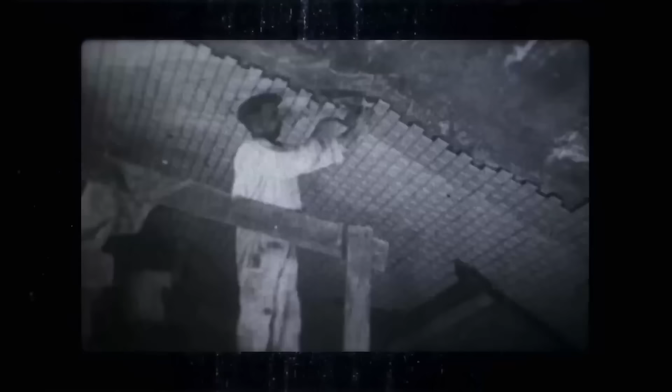Continuously modernized and always at the forefront of technology, it nevertheless retains the appearance of its early days. It owes this uniqueness to Parisians, who have held it dear since it was first created in 1900. Designed by visionary engineers such as Fulgence Bienvenüe, the father of the metro, and realized in an era where everything was possible, this megastructure has marked the capital with its imposing viaducts which crisscross the Seine. But how did they achieve such feats?

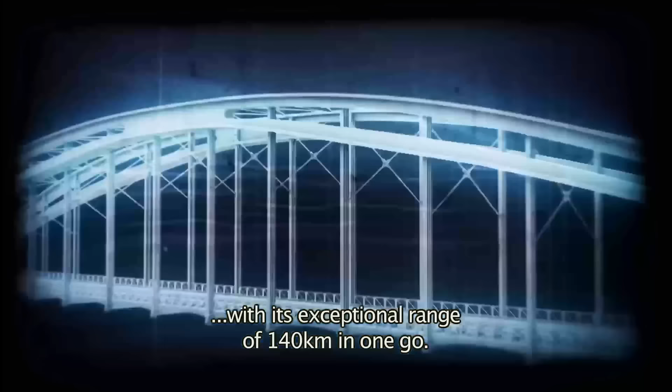The network has always benefited from the most innovative technologies. From the first wooden tunnels to chambers submerged in the Seine by freezing the ground, the construction, which began at the end of the 19th century, disemboweled Paris and boosted its performance.

As for the 400 trains, today they look nothing like the original wooden wagons. They are increasingly faster, more secure, automated and interconnected. The network has succeeded in its technological gamble and brought its historic lines into the modern age.

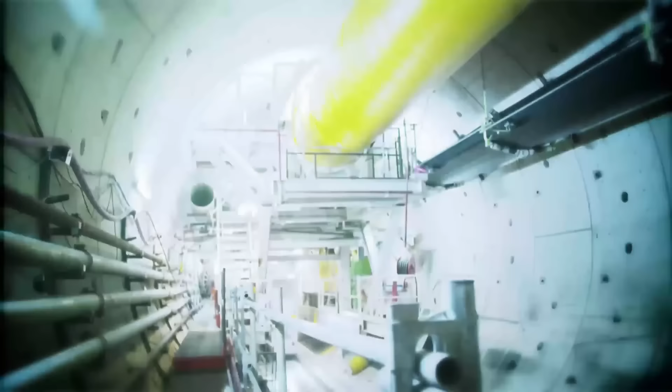Today, the network continues to grow, but the building techniques have changed. The Paris Metro uses the most innovative methods to continue its growth. These include giant tunnel boring machines capable of digging more than 30 meters deep.

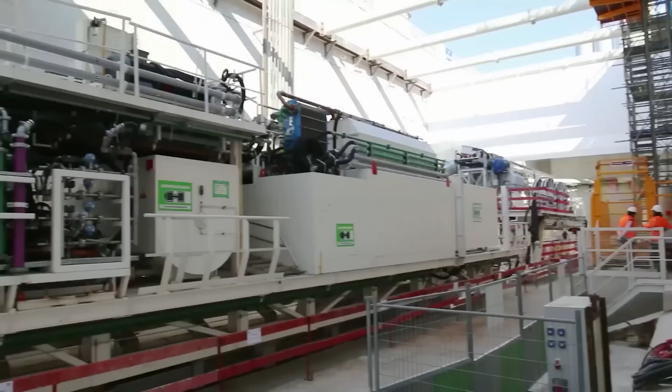We are in Saint-Ouen, on the site of the Line 14 extension, a titanic construction costing nearly €1.5 billion, situated in the heart of the city. Here, revolutionary techniques are used, making it almost invisible to the city's population. The project will add 6 kilometers and 4 stations to the existing line, linking the Saint-Lazare station and the Mairie de Saint-Ouen station.

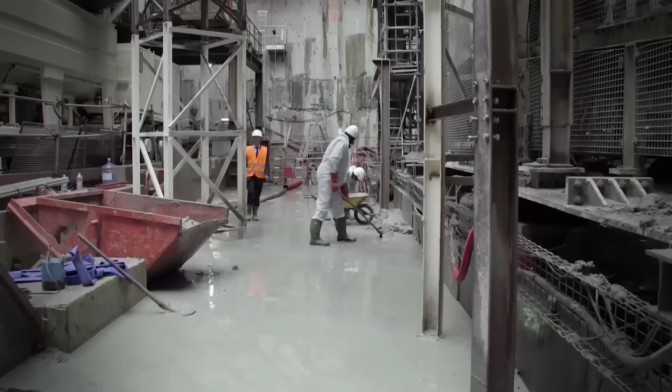25 meters below ground level, the tunnelling machine, Solène, is hard at work. It has covered 400 meters so far. Its aim is to create a new section towards Mairie de Saint-Ouen station.

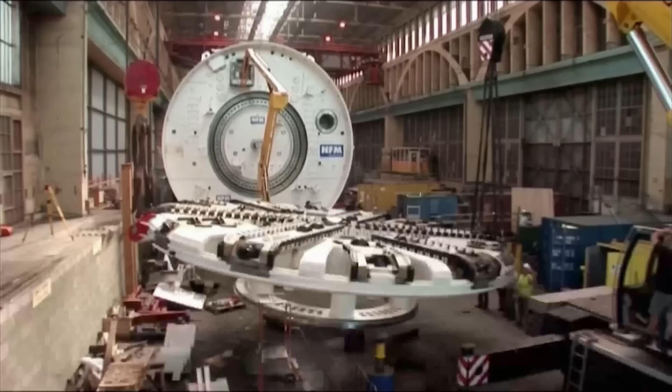Thanks to modern tunnelling machines such as this one in Saint-Ouen, developed by a French company, the construction goes a lot faster and the workers have given way to machines.

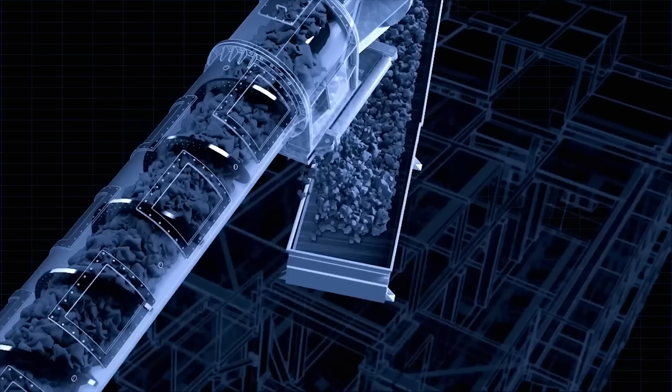The debris, saturated with water, is carried outside of the site on a conveyor belt. Stored in a reservoir, it is then taken away in lorries. At the same time that the earth is removed, the voussoirs which will form the tunnel walls are lowered into the starting well. They continuously supply the work of the boring machine.

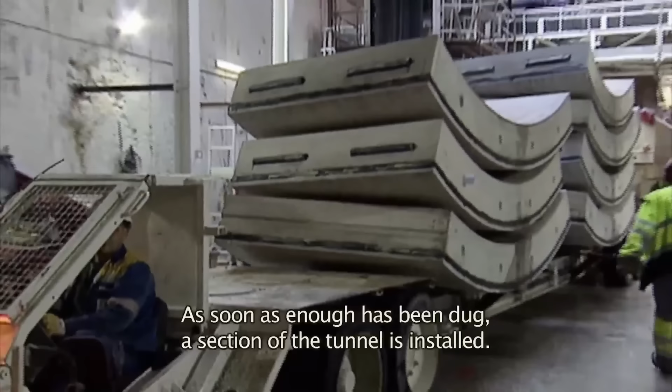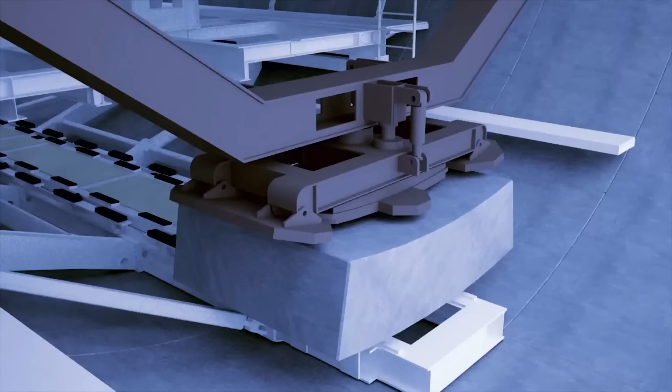Following the advancement of the tunnelling machine, a mechanical arm places the voussoirs one by one in a precise order. Assembled together, they will form the structure of the tunnel. The Romans used stone voussoirs to construct their arches. Like a giant puzzle, these prefabricated concrete parts weighing 6.5 tons fit perfectly together to form watertight walls. On this extension of line 14, it will take 7 to form a tunnel ring.

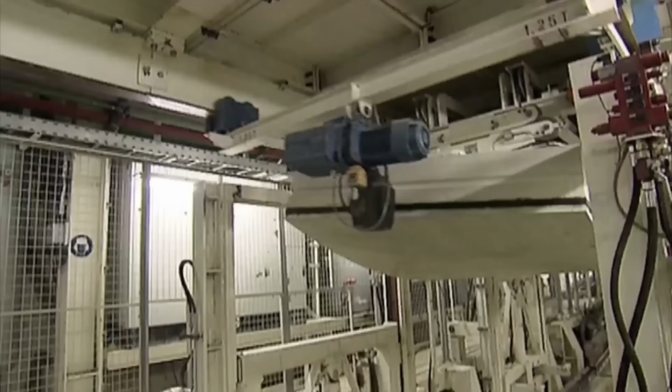No propulsion is required to move the machine forward. These hydraulic jacks allow the machine to lean against the voussoir that it installs and applies pressure which moves it forward. The tunnel boring machine at Saint-Ouen advances 200 meters a month towards its final target, situated more than 5 kilometers away.

The speed must be adapted according to numerous parameters, including the type of earth and the diameter of the borehole, similar to a drill that you don't want to overpower for fear that it might jam.

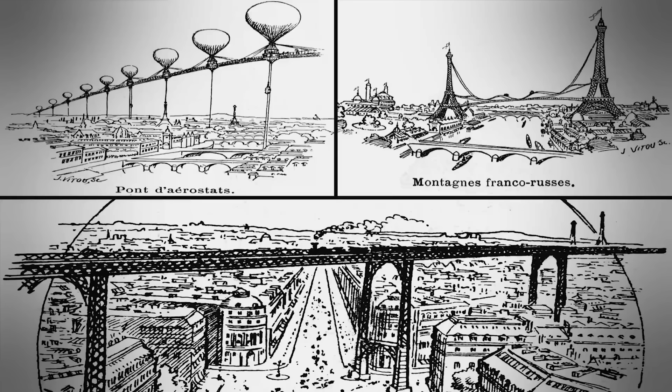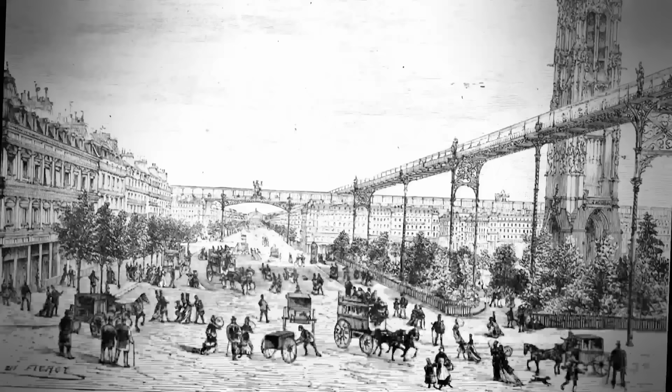Steam railway projects are discarded due to smoke emissions. The inventiveness of proposals for Parisian transport from visionaries and other passionate people is limitless. Airways hung by giant balloons, a suspended bridge between the two Eiffel Towers, an aerial tram passing over the city. Anything seems possible. The works of author Jules Verne seem to have inspired many of the projects, such as that conceived by a certain Monsieur Olivier, who in 1878 proposes an aerial tram passing over buildings in order to facilitate road crossings.

This goes on for 40 years, with no results. The Parisians will have to be patient.

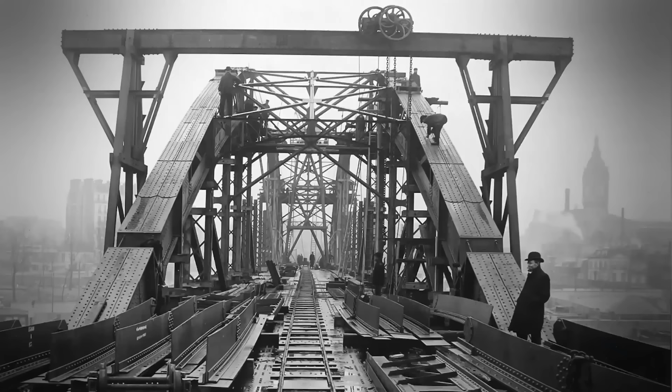The construction of the Austerlitz viaduct was decided in 1903 to link the two banks of Line 5 between the stations Gare d'Austerlitz and the current station Quai de la Râpée. In order to avoid interfering with river traffic, the navigation service demanded that it should have no supports in the middle of the river.

Situated 11.3 meters above the level of the Seine, the Austerlitz viaduct is made of steel. It consists of two large parabolic arches with three main joints, one at the top and two on either side near the riverbanks. The deck, which is 8.5 meters wide, is suspended from the arches by 16 supports in its center and 4 supports at its ends.

To withstand wind force, the suspension supports are connected by crossed structures. To reinforce the structure, the arcs themselves are also connected together. The selected project, therefore, outlined a viaduct with a single span of 140 meters, beating the 107.5-metre-long Alexandre III Bridge, which was until that point the longest in Paris.

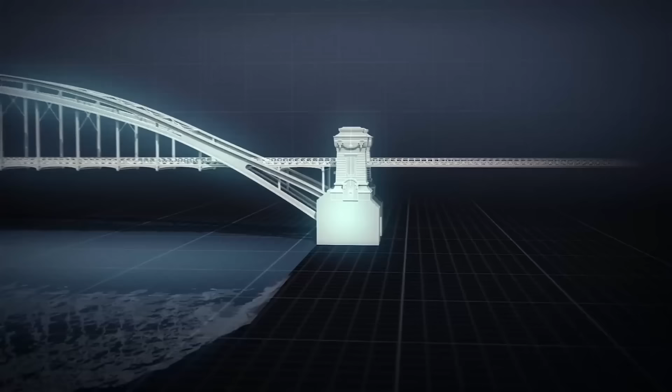On the banks, the viaduct arches rest on stone abutments, which are 22 metres long and 18 metres wide. Each of these blocks is surmounted by two 15-metre-high masts, which frame the deck of the bridge. A work that is truly extraordinary for its time. In July 1906, the construction is finally completed. Line 5, which links Gare de l'Est to Gare d'Austerlitz, is in service.

It is one of 6 lines which make up the initial project, but already a second stage of works is planned. For the designers, the metro must be for everyone, and no person should be further than 400 meters from a station. It is for this reason that the first line to be constructed consists of 18 stations for only 11 kilometers of track. It is the transversal line from east to west, which departs from Porte de Vincennes to join Porte Maillot. It runs along the Seine for nearly half of its length.

The construction for Line 1 begins in February 1899.

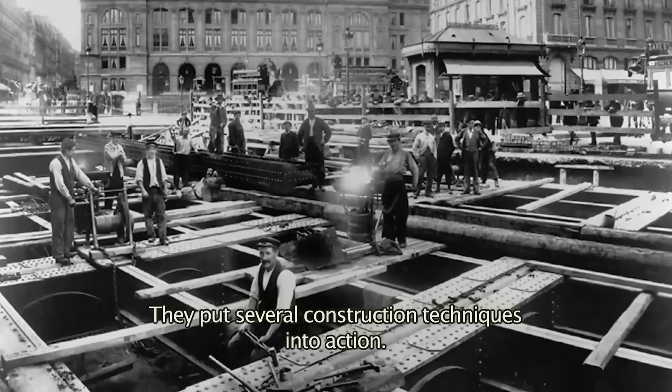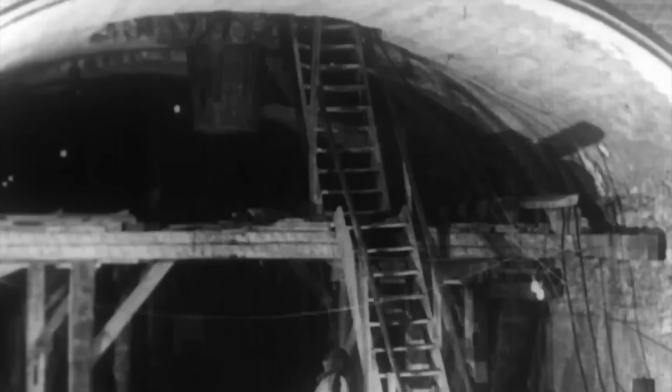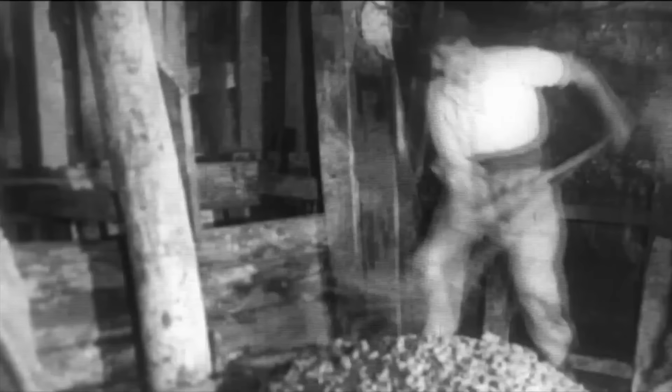This technique is used by all contractors in the construction of railway tunnels in particular. As in the mines, the digging is done by hand with a pick and shovel, grueling work that is carried out in extreme conditions. All the rubble is removed from the tunnels in wagons and transported to the surface. Some is used to refill Parisian quarries. As for the shafts, they are supported by enormous wooden beams, which also serve to create the shape of the future tunnel. Finally, still by hand, the vault is constructed from stone blocks, a work worthy of the construction of the pyramids.

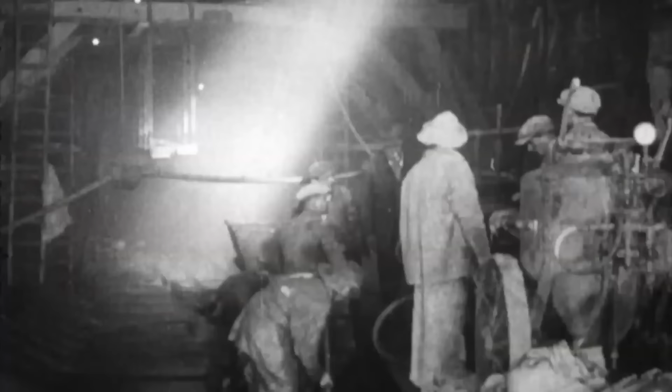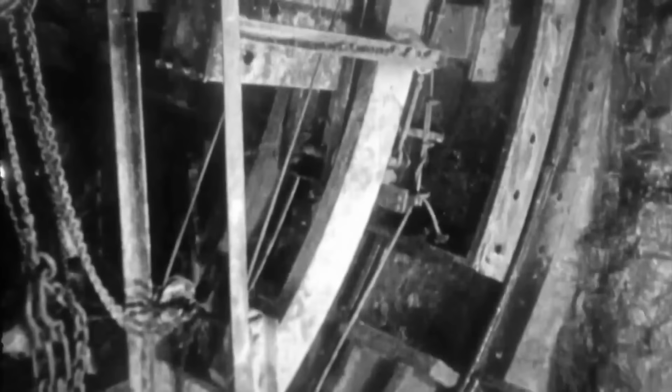In reality, the metal shield would not be used much on Line 1 because it is very slow, difficult to put in place, and stops as soon as it encounters a rock that is too hard. At the time, it was even sometimes necessary to dig by hand to move it forward in waterlogged terrain. These are the voussoirs placed one by one to create the tunnel ring. They are cast iron and positioned using a manual system. They give the tunnel its final shape.

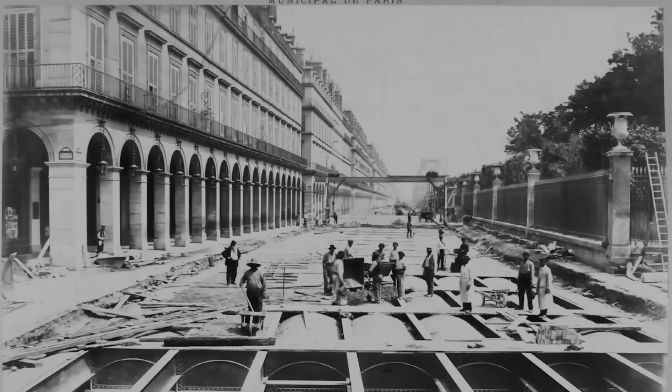The shield concept truly is the ancestor of the modern tunnel boring machine, but this technique will take decades to be properly developed. It will take a century for a tunnel boring machine to be used again in Paris. Today, it is hard to imagine the busy Rue de Rivoli in this state, and yet it is the hell that Parisians will live with for 18 months.

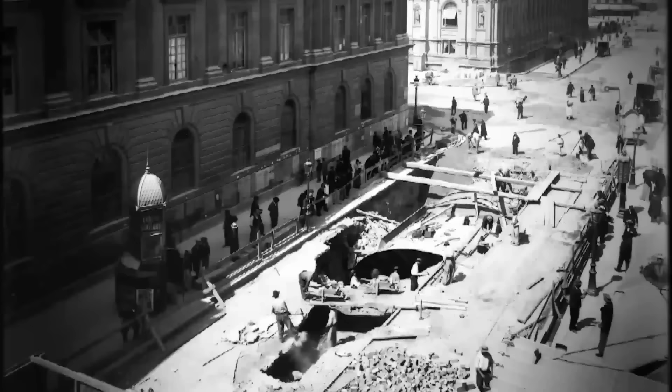This technique will be used near the Seine. Dug as shallow as possible to avoid leaks, the top of certain stations is sometimes only 60 centimeters from the wheels of the cars passing above.

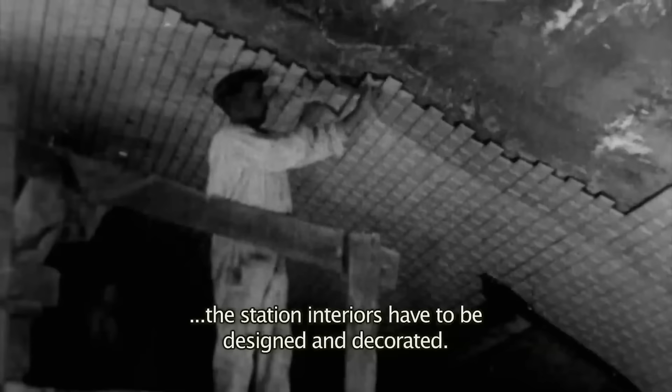The most advanced technologies were used in the electrification of the network. 2 coal factories were built to provide enough energy for this new means of transport. This requires colossal investments which already combine public and private money. It is the CMP, owned by Baron Empain, one of the financial giants of the 19th century, who takes on this formidable gamble.

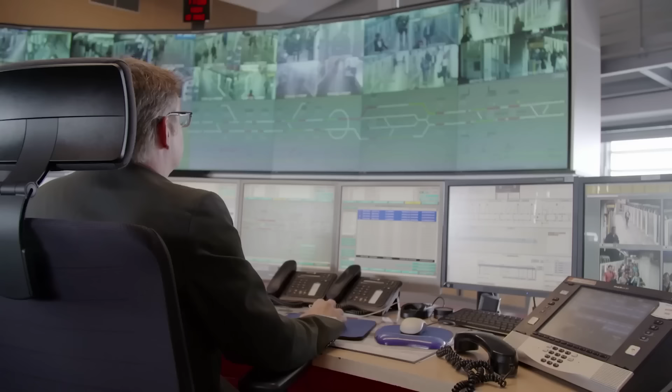With nearly 275 million people transported a year, the role of the Line 1 command post is paramount in order to respond to every situation as quickly as possible.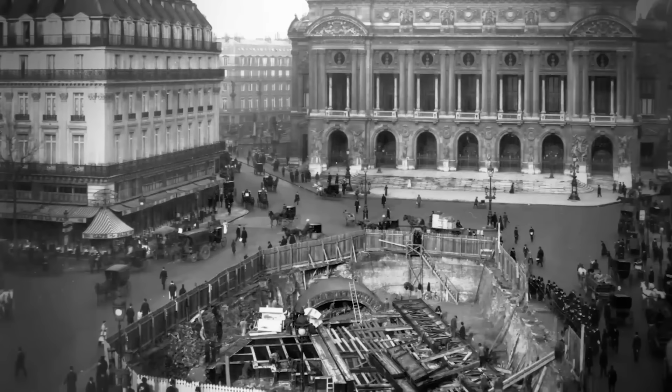This is the case of Opéra Station. It is 1904, an entrepreneur undertakes a Herculean task. Here he will carry out the feat of burying a gigantic block of concrete in which 3 metro lines will cross over, one above the other, something that has never been seen before.

Until now, Léon Chagnaud has only dug a few tunnels on lines 2 and 3. He owes his fame to the former. On it he will test advanced techniques and become one of the more important builders of the Paris Metro.

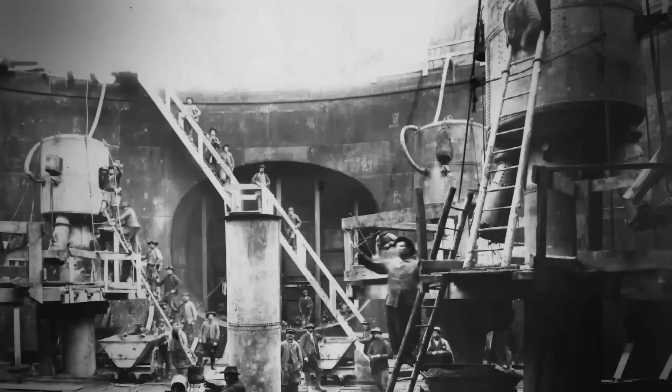Thanks to this success, he will be entrusted with an even more unbelievable mission: the first crossing under the Seine River between the stations Châtelet and Cité.

These 2 stations make up part of Line 4. Around 11 kilometers long, it leaves from Porte de Clignancourt and runs all the way to Porte d'Orléans.

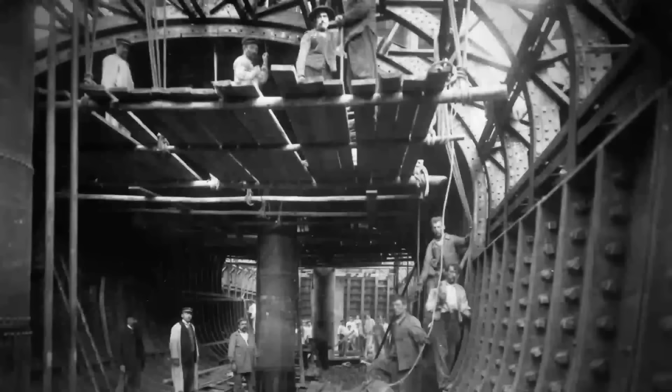They decide on chambers buried in the riverbed. Construction begins in 1905 and promises to be spectacular. There will be 3 large chambers for the larger branch of the Seine, covering 122 metres, and 2 for the smaller branch at 41 metres. The 5 chambers, submerged in the river, will be assembled on the Quai des Tuileries, where the engineers will create their innovations.

Each chamber is composed of a cast iron base housing the 2 future tracks. The whole structure is surrounded by a double-layered wall made from metal. The chamber rests on a base shaped like a knife blade, 1.8 metres high. Between the 2 walls is an empty space, which will become a workspace for the builders.

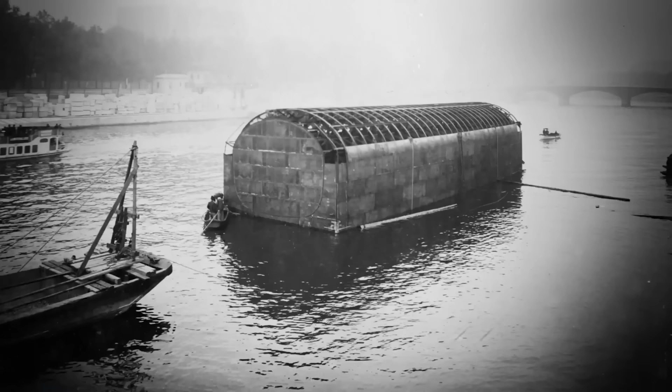The chamber, which floats on the Seine, is then towed to its future grounding place. After finding its ideal positioning, concrete is injected into the metal double wall, creating a watertight sarcophagus.

As promised by the contractor, the construction site, despite its size, manages to avoid interference with the swallows and passengers passing along the Seine.

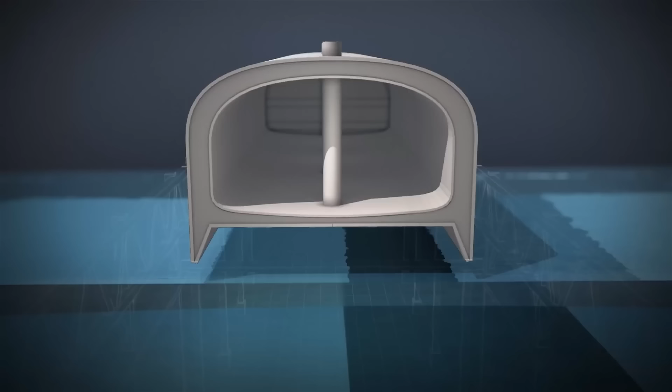Under the weight of the concrete, the chamber falls gently. Once in place, the water inside the work chamber is pumped out. The main chamber is weighted down to keep it in place at the bottom of the river.

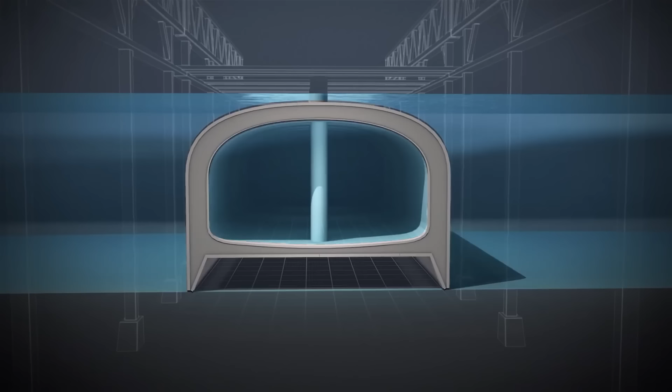Through chimneys, compressed air is sent into the work chamber, increasing its watertightness and allowing the builders to go down and dig under the metallic structure in order to sink it to the desired level.

Working in extreme conditions, these specialized builders, called tubists, must, like underwater marine divers, make decompression stops when coming back up from the work chamber, 15 meters below the surface.

Strikes, which were rare at the time, will mark the history of this abnormal building site.

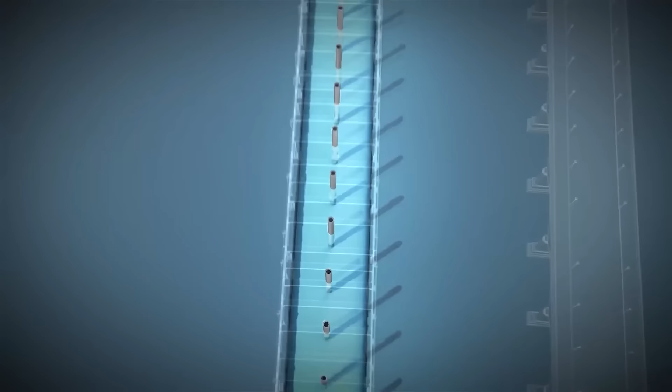Thanks to the work of these capable men who took on this risky work, all the chambers of the same section were finally lowered to the right level on the bed of the Seine. They are then joined together to form a single tube. The work chambers are filled with concrete and the trench is filled to ensure the structure is locked in place. The tunnel is complete. The water is then pumped out and the workers can finally access it.

This part, the most dangerous, takes place without any major problems, but the same cannot be said for the chamber under Île de la Cité.

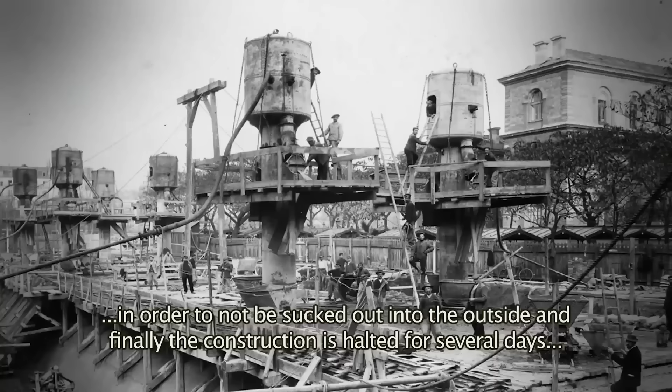The pressure is so high in the chamber that they were ejected outwards like the passengers of an airliner whose door would suddenly open mid-flight.

The stations Cité and Saint-Michel, situated on the mainland, must also be buried. Once again, the sinking technique will be used, and the builders will go down into the work chamber to pick away the waterlogged earth from below. A colossal job, especially when you see the images of these enormous steel hulls that gradually disappear into the ground.

But the construction is not finished. A new difficulty stands before Léon Chagnaud: they have to pass beneath the railway line connecting Austerlitz and Orsay without it collapsing.

This freezing technique makes it possible to carry out dry work in water pockets and so enables the digging of more stable ground. For this, 2 refrigeration plants were built along the Seine. From there, pipes circulated salt water cooled to minus 24 degrees.

The digging shaft passes beneath the railway line which links Austerlitz and Orsay. So that the tunnel works did not endanger the tracks, the ground is frozen by inserting 24 refrigerated pipes which went 14 meters deep. The volume of earth to be frozen is considerable, more than 2,000 cubic meters. This technique is so expensive and so complicated to develop that finally only 14 meters are treated.

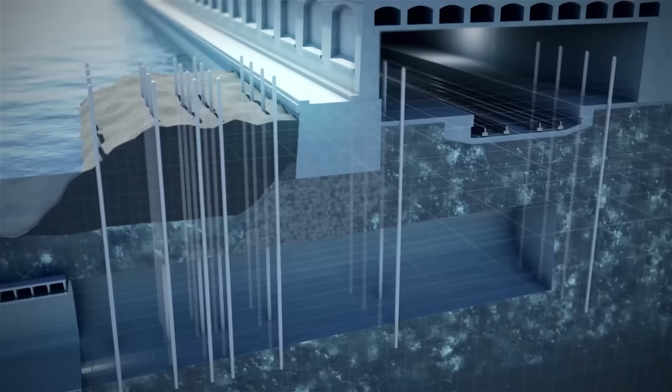After 40 days, the ground is sufficiently frozen. The freezing works so well that the builders, who work with picks, have difficulty digging. The work is reaching the limits of what humans can achieve, and the construction can only take place at night when the trains do not run.

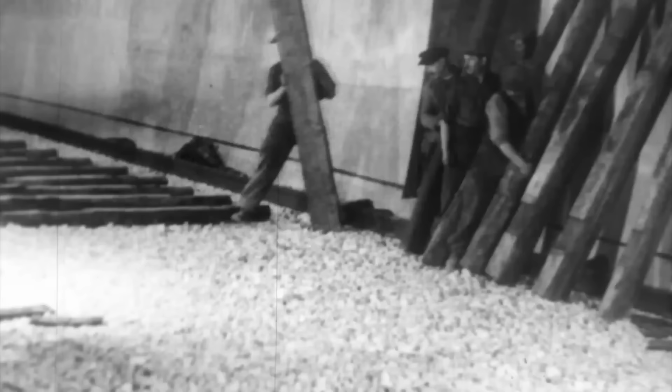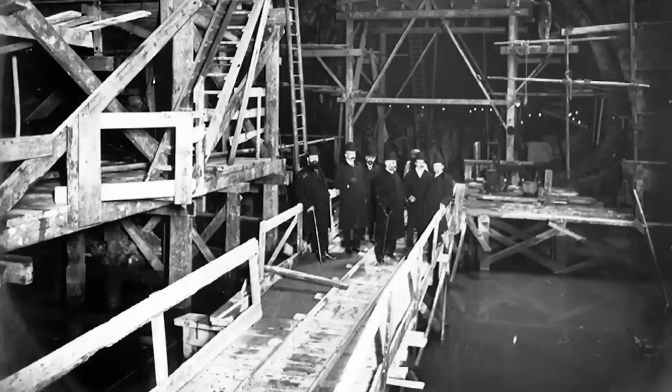In 1909, after 4 years of hard work, the gargantuan construction of the Seine crossing is complete. Up to 700 workers were employed at one time. The General Inspector, Fulgence Bienvenüe, comes to inspect it. His dream has become a reality.

2 years later, elevators are installed which give access down to Cité and Saint-Michel stations, situated far below the surface of the Seine.

On the eve of the First World War, nearly 40% of the network was already built, making up 90 kilometers of the 220 kilometers that exist today. In 1939, 160 kilometers are in service. At this time, the metro already carries 500,000 passengers. Over the following years, 60 kilometres will be added to the lines to complete the network.

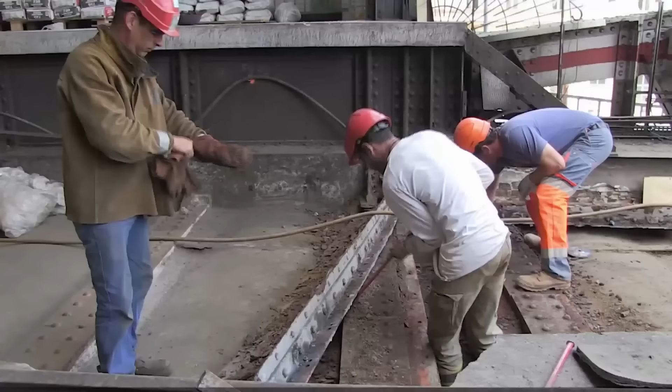Today, the 14 existing lines are subject to wear and tear and various incidents. This enormous structure is therefore constantly monitored, and everything possible is done to keep the lines running. Some, built at the very beginning of the 20th century, are totally renovated, respecting the spirit of their unique heritage. This is the case particularly of the aerial lines, whose metal structures have for decades met the expectations of the engineers who designed them.

This is why the metro, now indispensable to Parisian life, never completely sleeps. Each night, 2,000 agents work to maintain the tracks which zigzag through the bowels of the city. The RATP workers must work fast, as they have to leave their work sites before 5 o'clock in the morning.

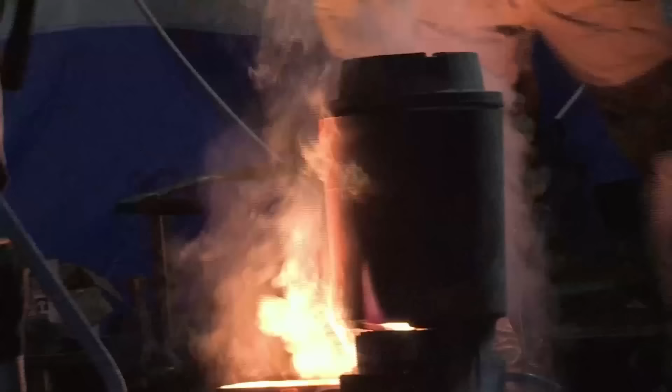Technicians today still use techniques developed by generations past. To assemble the rails to be replaced, they are welded together with the help of a sort of small portable foundry. This is a technique used even in the 1930s. The hundreds of metro trains travel tens of thousands of kilometers each year, requiring colossal maintenance.

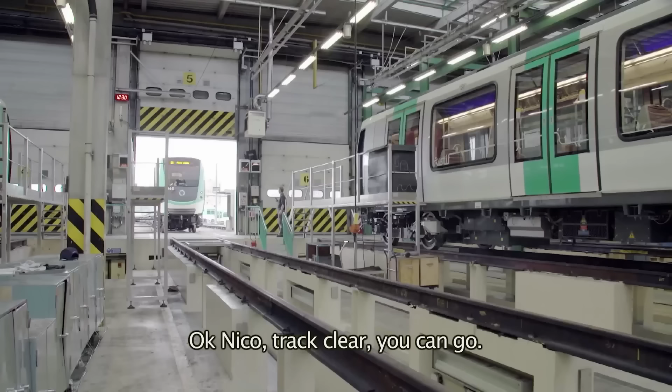Each line has its own maintenance workshop. We are in Bobigny. All the Line 5 trains come here to undergo maintenance, tests and repairs at least 5 times a year.

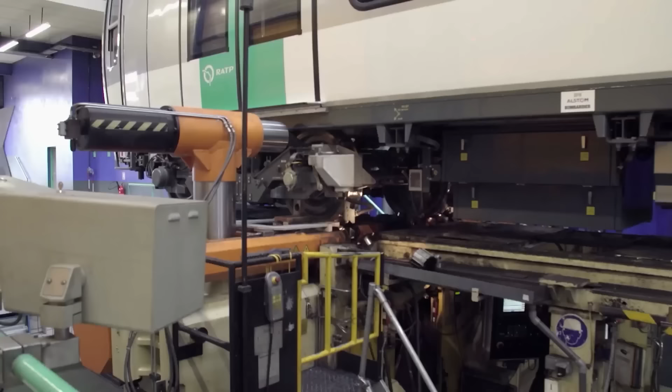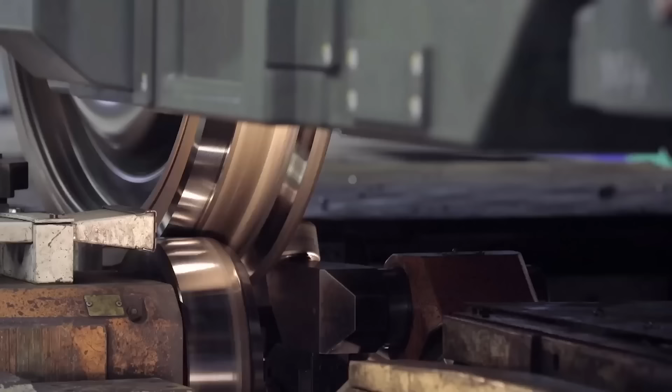Like with car tyres which wear out and become misshapen, the metal wheels of the metro trains require a reprofiling every 200,000 kilometres, or 3 years of use. It is a way of improving the comfort of the passengers and also ensuring optimal safety by gaining adhesion. Here the cars are checked from every angle.

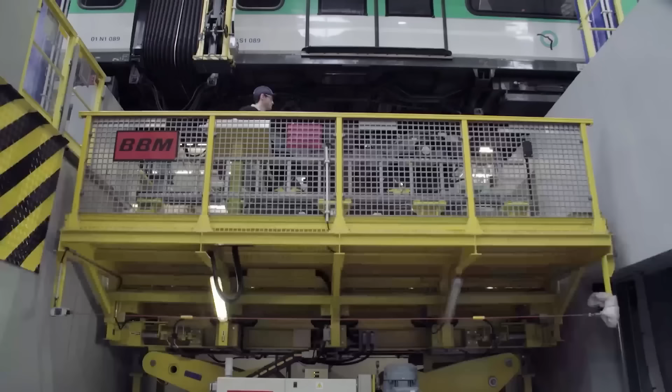One of the main advantages of this state-of-the-art workshop is the possibility of working on the bogies, which include the engine, the undercarriage and the axles, and which weigh more than 7 tons. Huge hydraulic cylinders separate the wagons from the bogies. An exceptional system which allows them to be repaired or changed.

It is a long way away from the manual workshops 50 years ago, where adjustments took forever. Technology has revolutionized the RATP maintenance workshops. But today, like yesterday, nothing is left to chance here.

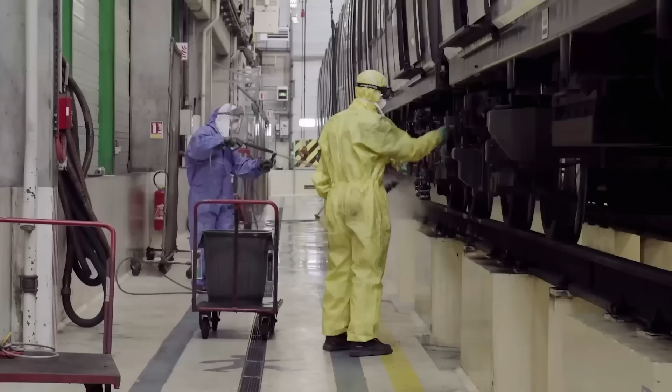An operation that is required to facilitate the technician's diagnostic, who check each part, and also to avoid any possible accidents where the oil might risk setting on fire due to the heat. There have been few fires, sometimes with unexpected causes, since the metro opened. The most tragic took place just after a few years of use, on the 10th of August in 1903.

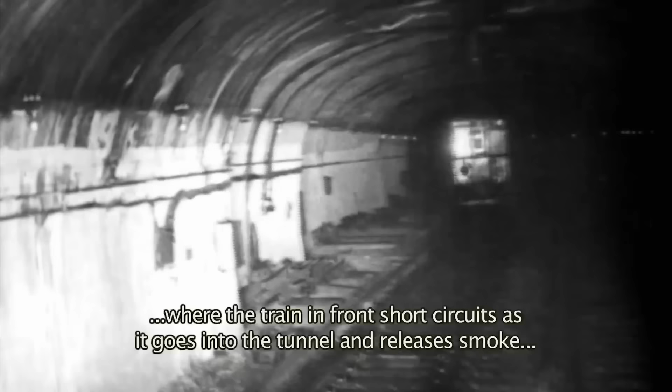The grief is immense. The young metro has just claimed its first victims. Its operators will learn many lessons.

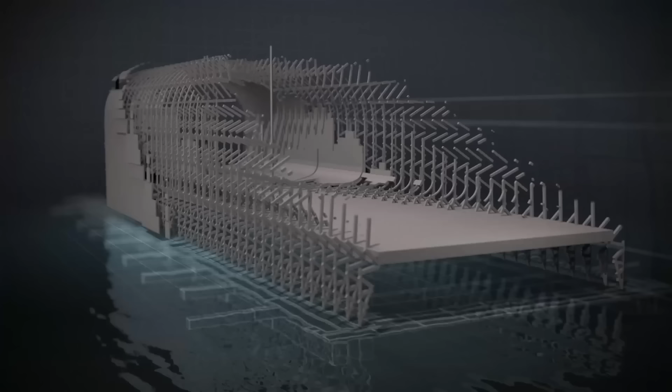Line 14 is the 7th line to cross the Seine between the stations Cours Saint-Émilion and Bibliothèque François Mitterrand. 90 years after the first operation to pass under the Seine, chambers will once again be used in this crossing, but this time no one's life is at risk. Gone are the days where men work under the huge metal structures. Excavators with giant arms are used to make a huge trench, 14 meters wide, in the riverbed.

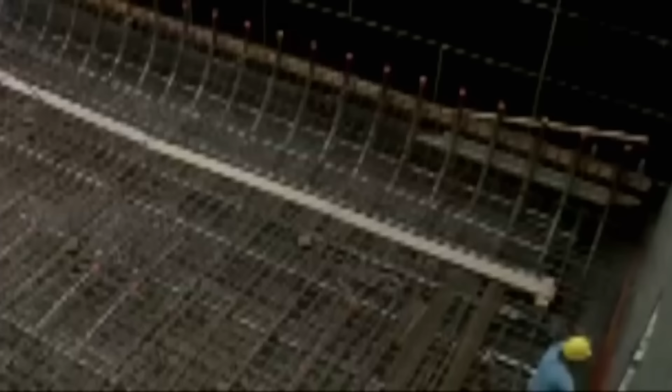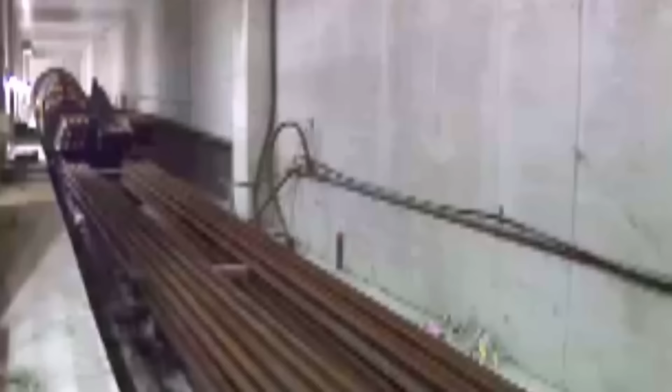The 4 chambers are 34 metres long, 6 metres high and 9 metres wide, and made of prefabricated concrete. They are constructed directly on site. Submerged slowly and under heavy surveillance, they are then directed towards their grounding site. Positioned in line with the trench, the chambers disappear into the Seine, reaching their final placement. They are then covered with earth. Joined together, they form a new passage under the Seine. Nearly 20 years later, Line 14 opens. New extension works begin.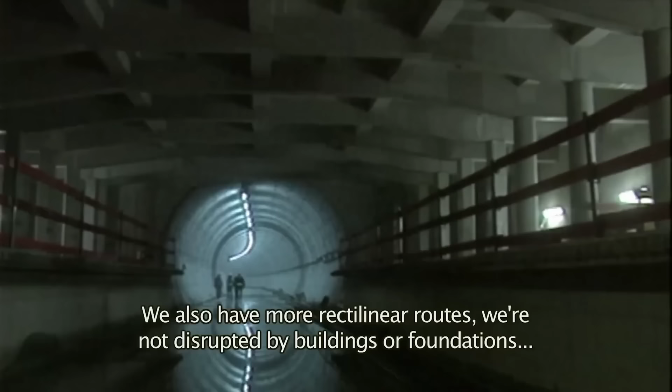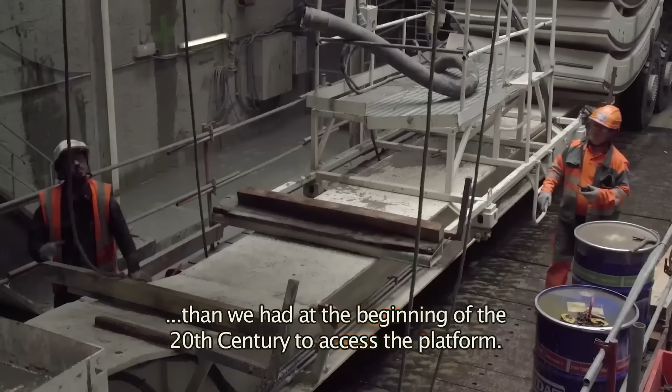These works can be carried out without disrupting traffic circulation, a true feat.

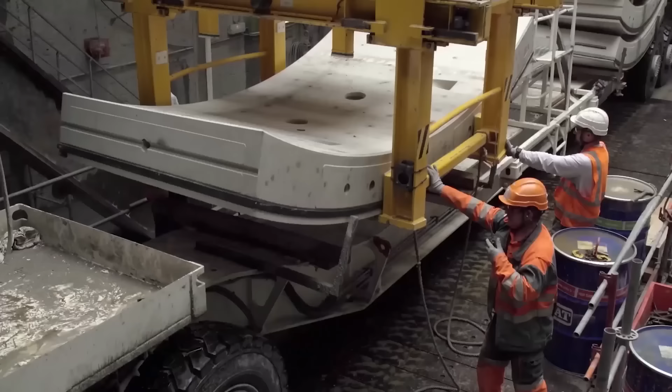The Line 14 extension will open in 2019. After this, it will see other additions, such as an extra station in the north, in Saint-Denis-Pleyel, and an extension of around 15 kilometres in the south, joining Orly Airport. These 2 new stations will be connected to the whole Grand Paris Express network. This is the big idea of the Grand Paris network, to multiply the connections within the existing network. This will be the case for 75% of the new stations. Quite an accomplishment when you consider the importance of the construction, which is beginning.

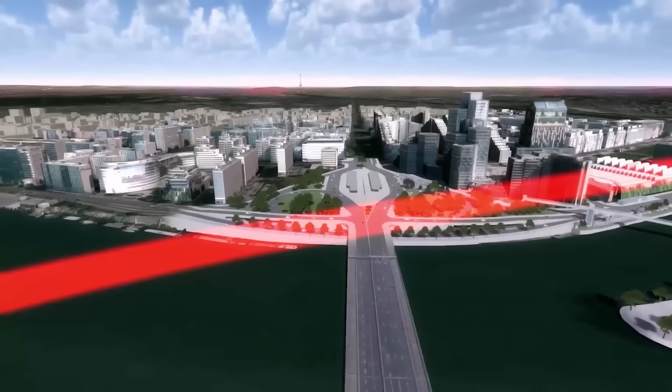A circular network for skirting around Paris and saving time. For the Line 15 South, which will link the west and the east of Paris without passing through the capital, 13 architects have designed 16 new stations. They no longer seek to hide them. They are thought to be true living spaces, making their mark on the heart of the city.

Soon, this formidable structure, conceived by its creators as a self-contained system, will be connected with the Grand Paris Express line, but also to the RER lines, forming a network over 1,000 kilometers long. The Paris Metro, a giant megastructure born more than a century ago, and which relies on its history to write its future.